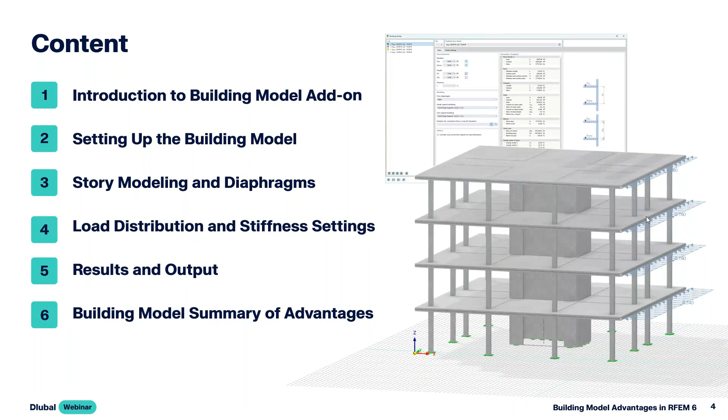So for those of you joining us today that are familiar with our program RFEM 6, we do operate with this add-on concept. So this multi-story structure can certainly be modeled in RFEM 6 alone. However, we do have some advantages of the building model add-on that is available in addition to the base program RFEM. The first is to apply story-based organization. So essentially, we can take this 3D model within this general FEA software of RFEM, and now we can define stories, which again is ideal for multi-level story structures. This allows us to make quick changes to our floors rather than manually having to edit those.

We also can carry out the gravity and lateral analysis together within one file. We don't need two separate programs. We don't need two separate files. So we'll see today how that can be carried out.

We also can simplify the load distribution and apply diaphragm stiffness settings across our floors. So we'll discuss in great detail those two topics today within our example. Now, this is certainly possible within RFEM 6 alone, again, without the building model add-on, but we're having to manually make these modifications directly within the stiffness matrix of our floor, for example. When we do utilize both a semi-rigid and rigid diaphragm, we also have the ability to separate out what we call the 3D wall from the 2D floor calculation. And again, we'll be covering that in our example today.

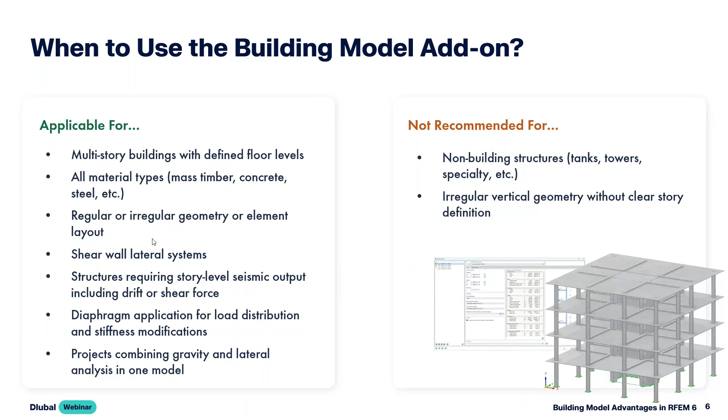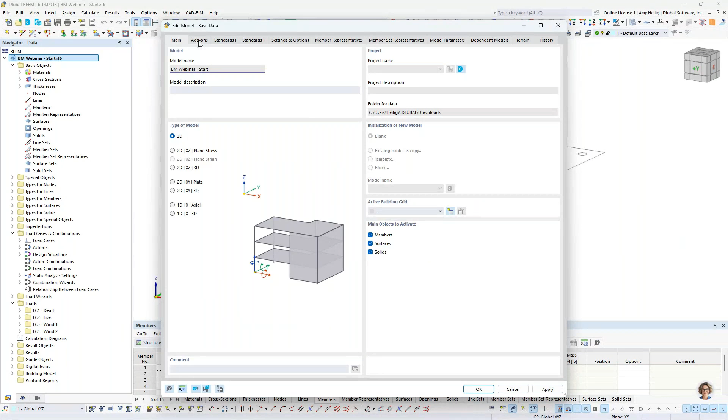Okay, so we will get into our first example today within RFEM 6 directly. So when you do begin a new model here, you are presented with the base data dialog box, and the type of model will be in the 3D environment. The second tab within the base data is all of the available add-ons. So of course, we'll be focusing entirely on the building model add-on, which is activated for today's example.

But as mentioned, it would be quite common to pair this with some of the additional design add-ons, like concrete design, to carry out the reinforced concrete design according to the ACI or the CSA standards. Steel design, timber design for mass timber structures is certainly also possible. We will be generating our load combinations automatically according to the ASCE 7, the 2022 standard, but of course, many other international standards are supported.

So once we have defined this information, we are within the main program RFEM 6. And you'll notice here that I have already imported in a DXF file as a background layer, so this will just assist me with my modeling. If we go to guide objects, and I'll go ahead and collapse this additional folder here, down at the bottom within background layers, this is where I have just imported in a DXF file directly from something like AutoCAD. You can see the elevation was set at 10 feet in height.

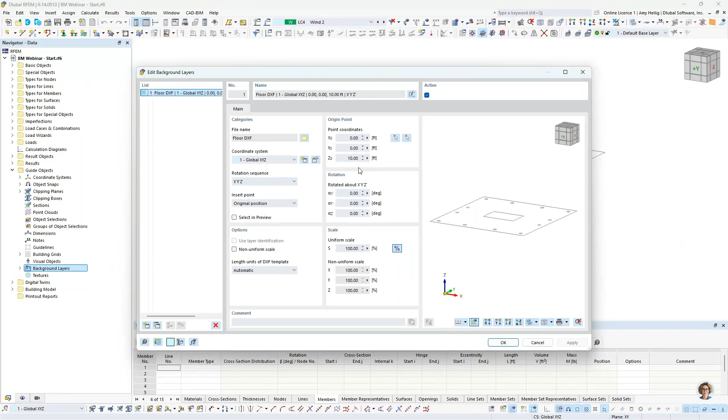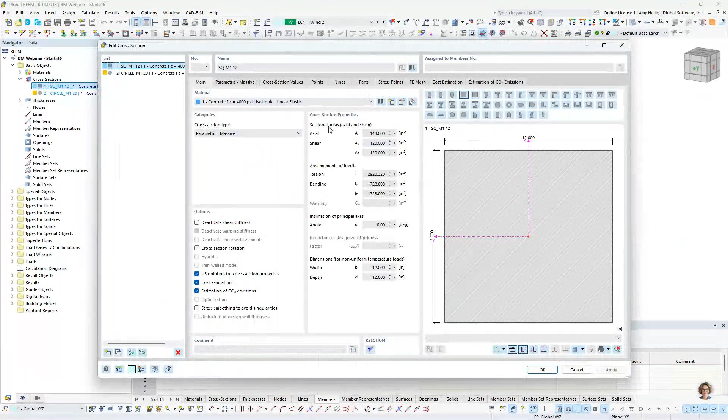I also have defined here some basic objects just to get our model started today. For example, I have defined already from our material library 4,000 PSI concrete - it will be a concrete structure for this example. I also have defined a couple of cross sections. If we look at these existing cross sections, we have a couple of them, just a square cross section, 12 inches by 12 inches that I'll use for my beams, and then a circular cross section, 20-inch diameter, that I will be using for the columns, both with the 4,000 PSI concrete assigned.

I also have a couple thicknesses defined. Thicknesses are assigned directly to 2D surfaces within RFEM. The first thickness is 8 inches - this will be used for our elevated slabs. And then we also have an additional thickness of 12 inches that will be used for the shear walls, again, both assigned with that concrete material.

So we want to begin modeling our structure, but before we do, I'm going to access the building model folder over on the left - this is only available because I've activated this particular add-on. I can right click here to create a new building story. Now, this dialog box we will get into in much more detail a little bit later on, but I want to initially define my first story with a height of 10 feet. And I'm going to create 3 additional stories here, again, all with a varying height of 10 feet. So 4 stories defined - again, we'll get back into this dialog box a little bit later to explain it.

So we see those listed here under the stories. So we're now ready to begin modeling, and I will go into an elevation view here and utilize this background layer. With the building model add-on, we have some additional tool options here that are not available in RFEM 6 directly, and this is just to make our life a little bit easier when we're modeling these elements at every single story for a multi-story structure. We will begin here with defining and drawing our column elements.

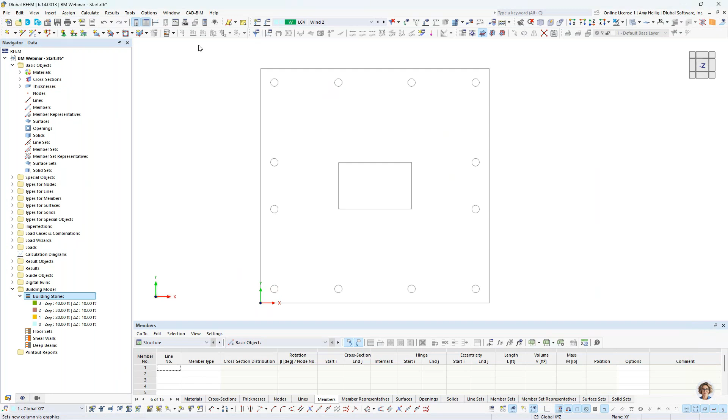So we go ahead and select column from this special toolbar, and the member type is set to beam. So remember, RFEM is a general FEA program.

A beam is really just any standard member, whether a beam or a column, so we'll leave that member type as is. For the cross section of our columns, we'll toggle down to the existing circular cross section already defined. We could additionally add moment releases like hinges at the member ends, but if I don't define anything, everything is considered fully fixed, so we'll leave our elements fully fixed for today.

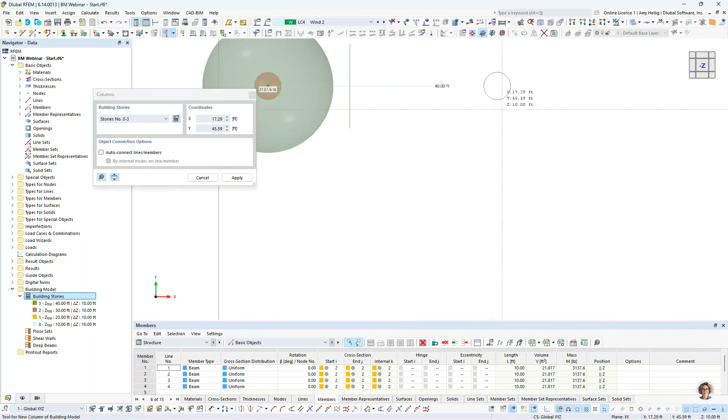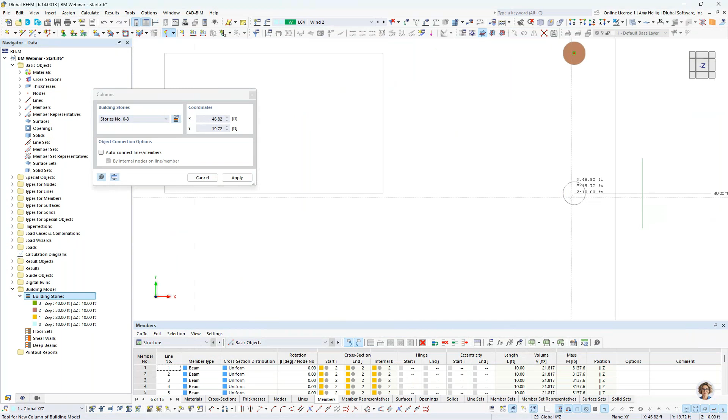There's a special dialog box specific to the building model tools where I can draw this column but apply it to all stories, so all stories are activated here. Zooming into my DXF drawing grid, we can apply these columns with a single click at the center of the background layer. Notice this big ball that adjusts every time I snap to create a new column - that's the center of mass, which detects every new element added and adjusts accordingly.

We'll go ahead and assign the additional columns at the bottom of our page. I can right click to exit out of this tool. If I turn this to an isometric view, you can see these columns were applied to every floor level - so these building model tools can be efficient.

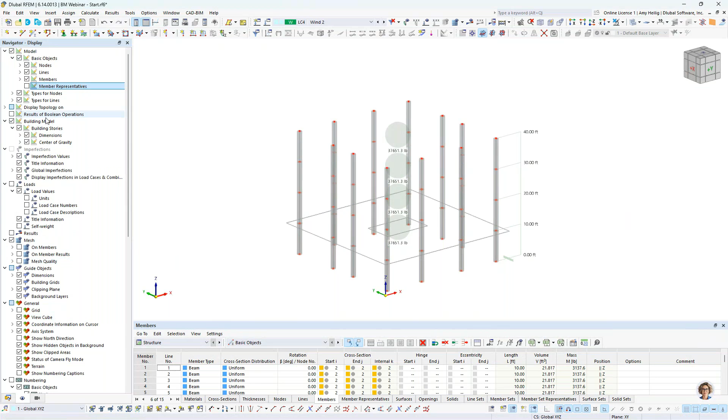I'll go ahead and hide what we call our member representatives graphically. Also, if the center of gravity or center of mass gets in your way graphically, we would just go to the navigator, the second tab, and under the building model, deactivate that. So going back to the plan view, we want to move on to drawing our beam elements.

Utilizing the building model tools, we have the ability to select a new beam. Exact same workflow as we saw for the columns, but this time I want to select my square cross section. I click OK, and then I snap directly to the center point of my column. I right click once to exit, and go ahead and do the same thing here.

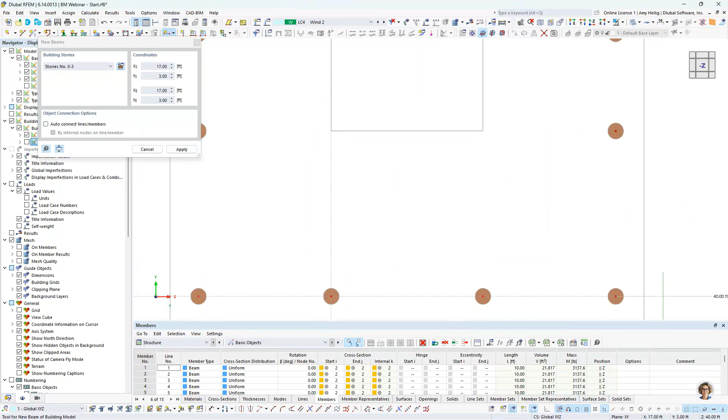I'll be connecting these to what will be our shear walls eventually. These can be thought of as collector beams, for example, transferring lateral loads from the columns to the shear walls. We'll apply these beams at the left-hand side and finally at the right-hand side.

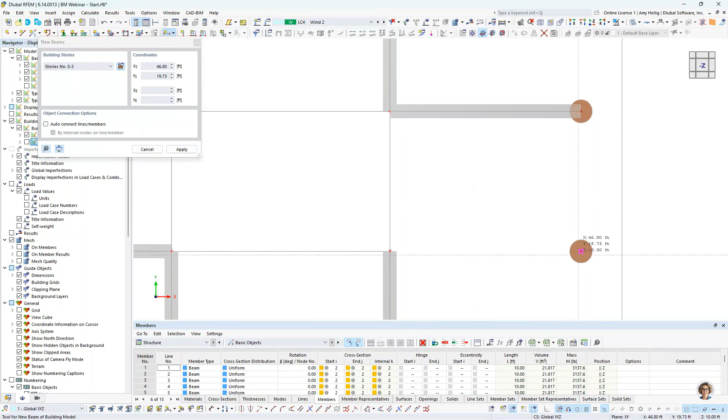Now that the beam elements are defined, those should be applied to every floor. We right click to exit, and we're now ready to draw our elevated slabs.

Within my building model tools, I'm now going to access a new rectangular floor - a two-dimensional surface element. I've already defined the thicknesses within the model, so we'll select our 8-inch thick 4,000 PSI concrete from the dropdown. I click OK, and this only requires 2 clicks from left to right, and now my elevated slab should be applied at every floor.

We likely need some opening passing through the center of each floor through these elevated slabs. Once again, we have a nice feature in the modeling toolbars where I can draw a new rectangular floor opening, but this time I don't want to apply it to my top story, only the first 3 stories. Once selected, I click on 2 points to apply that opening, and toggling to an isometric view, you can see those openings are now applied to stories 1, 2, and 3, but not the top level.

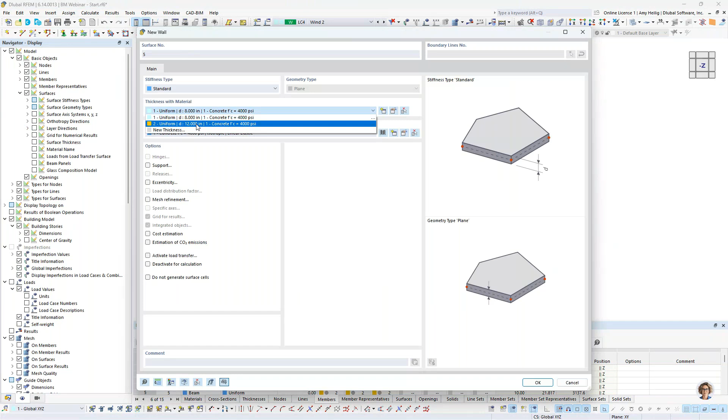The final modeling element we want to apply are our shear walls. We go back into the plan view and select a new element from our modeling toolbar, such as a wall. This time we want to toggle the thickness to 12 inches. I click OK, zoom in, but remember we deselected our top story, so I'll select all stories again to apply these shear walls, then simply snap to my points to draw in these 4 shear walls.

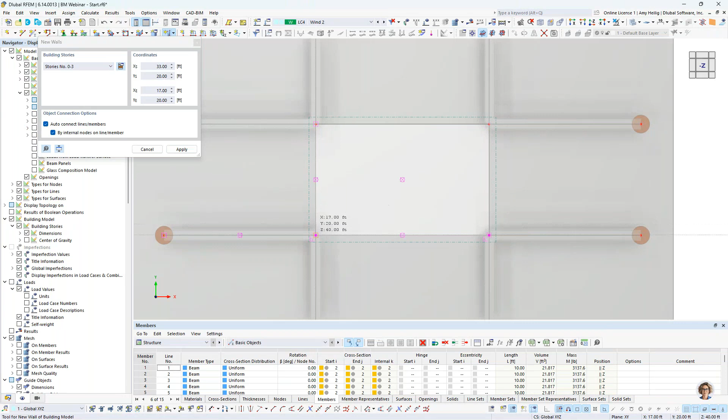I'll go ahead and close the loop here. I can right click to exit twice, and now we have our shear walls modeled. The final modeling step, though, is we probably want to add in openings here to the shear wall, maybe for some elevator, stairs, whatever it may be.

Going back to the plan view, let me turn this into wireframe, and I'll go ahead and select only the front shear walls to create a visibility by the selected objects. You can right click to deactivate the hidden objects. Also this DXF background, if we wanted to turn that off, we could do so within the navigator over on the left.

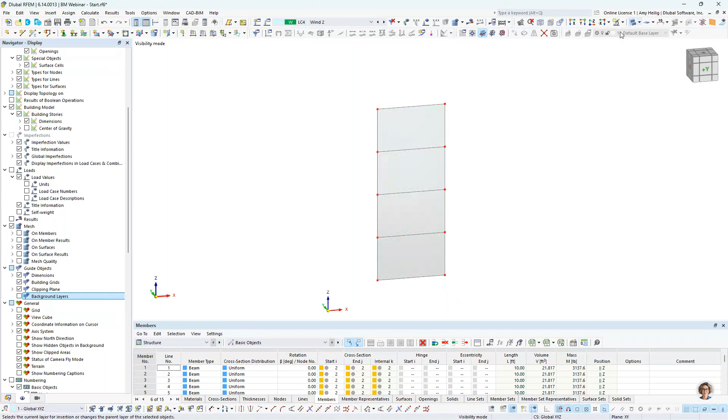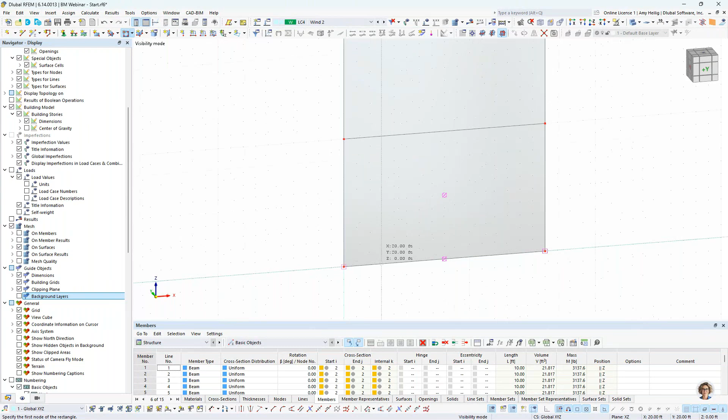Turning this into a rendered view, I do want to activate my drawing grid, so we will snap this drawing grid just to assist us with adding that opening here, and change the orientation. I want to apply a new opening, just the standard opening tool that we find within RFEM 6 directly. So a new rectangular opening, and I'm going to snap here from my point, which is about 3 feet from the edge. My second point will be an additional 3 feet, and we have our opening modeled.

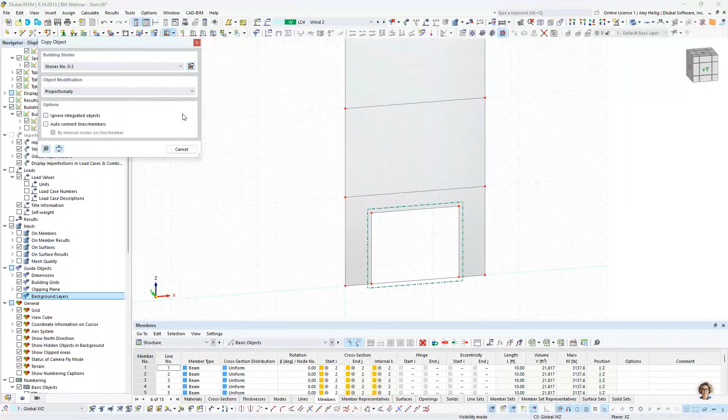A nice feature going quickly back to these modeling tools is this option to copy an object. I certainly could use my Move Copy tool, located here in my toolbar, to copy this opening up. But with the building specific tools, when I choose the option to copy an object, all my stories are selected, and I can click on this opening directly, and you'll notice that it replicates it up to all of my stories.

The quick thing to do here for support reasons is I would like to divide this line where the opening occurs, so I'll use my connect lines and tools just to break apart that line. Canceling out of this visibility mode, we are fully done with the modeling of our structure.

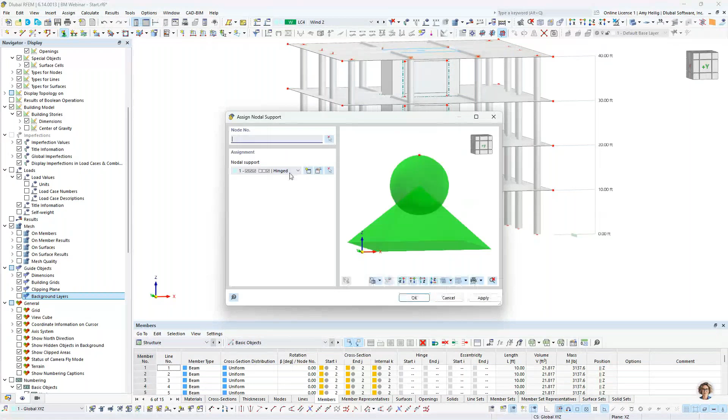What we would like to do now is apply supports at the base. So quickly doing that, we will apply new nodal supports, and we'll use the default option here as hinged supports. I click OK, and then I can graphically highlight over or click on the various columns here. We have one more column in the back, I'll go ahead and apply this to. I can right click to exit that tool.

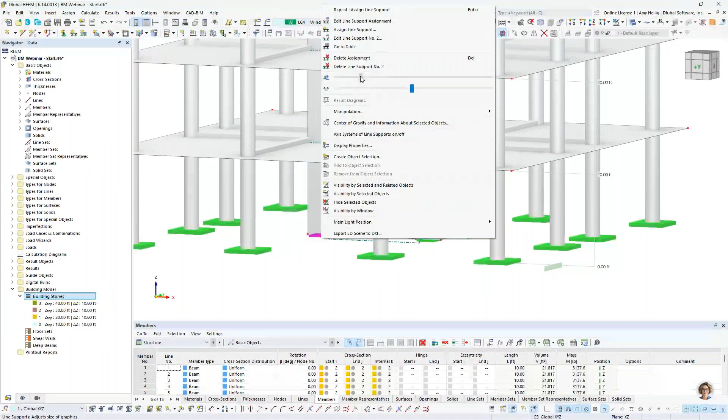Now we also want to apply line supports to the base of our shear walls. In a similar fashion, we will select the new line support option, taking advantage of the default fully rigid support type. We click OK, and then I can graphically select my lines at the base of the shear wall. Visually looking at the support options, I can always right click to decrease the size of these, or maybe increase the number of supports on a line support if I want.

Same concept here for the nodal supports. If I want to decrease the size, we can always use this slider.

Now we would like to move on to some simple loading for today's example. I'm going to go into my load cases and combinations dialog box. Remember, we are generating our load combinations automatically according to the ASCE 7 with this combination wizard turned on. I already created 4 simple load cases for our structure today: a dead load with self-weight activated, a live load, and 2 wind loads. All of these have the action category set according to the ASCE 7, as we need to know how to combine those into the load combinations.

So jumping to the load combinations themselves, we can see all of our factored load combinations generated in orange and all of our unfactored load combinations generated in red.

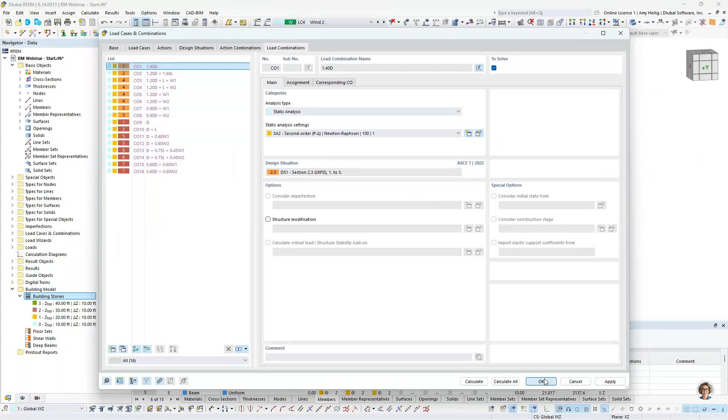Now that those load cases have been defined, we need to actually apply the loads to the structure, so we can jump here to our dead load. Again, for today's example, very simple loading applications: we will just apply a new surface load for our dead load. The load magnitude here is going to be set at negative 0.05 kips per square foot in the global z direction. Then I can graphically select my surfaces to apply this gravity load, using my selection box here to highlight surfaces 1 through 4.

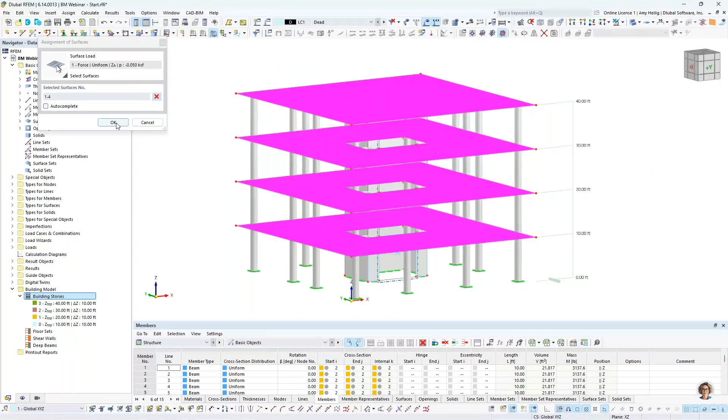If I click apply and next, I remain in this dialog box, and you'll notice in the background these loads are applied to the structures. The openings are also considered at the lower floor levels.

This also allows me to toggle simply to live load. I can modify the load magnitude here, negative 0.075 kips per square foot, and I can directly type in surfaces 1 through 4 on my keyboard, and click OK. Same concept here for live load.

Now for my wind load cases, I did want to make it known that we do have a load wizard, so we could generate these wind loads automatically according to the ASCE7. The structure is perfect for it, it's a rectangular type shape. We can generate load cases 1 and 3 according to the ASCE7, or if we had a rigid diaphragm, load cases 2 and 4 in addition to that. There's also a snow load generator, so I encourage you to check these load generations out utilizing the load wizard.

But for today, again, very simple example, we'll just manually apply these lateral loads. So for our first wind load case, I'm going to apply a new line load. This is not to be confused with what's right next to it, a new member load. A line load would be applied directly to surfaces.

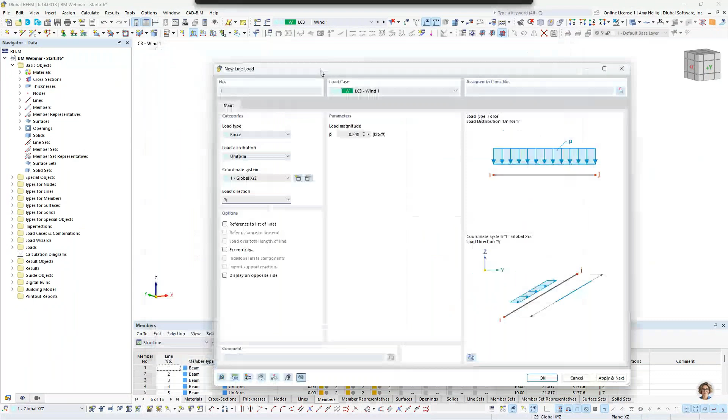So choosing a line load option and modifying the magnitude here of negative 0.2 kip per feet, I am going to apply this in the global Y-axis. We can see our axes here in the background. And then I will graphically select the lines where this lateral load will be applied.

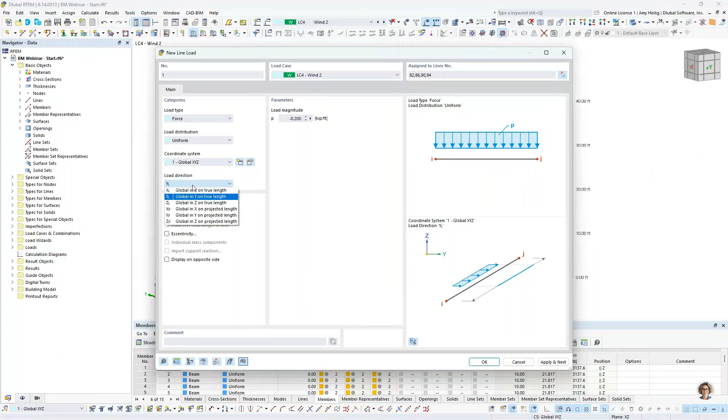Again, clicking apply and next, it is applied in the background here, where I can now toggle to my second wind load case, and simply apply this to our line elements over on the right-hand side by clicking on them. We also want to change the load direction to the global X, and I can click OK. So now we have that additional lateral load for our fourth load case.

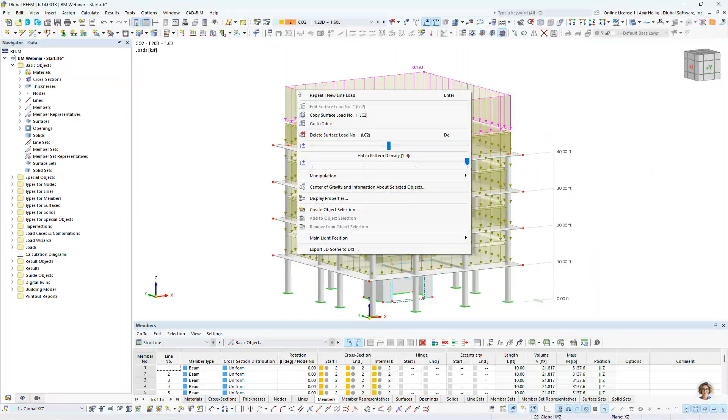If you're interested to see these load combinations applied to the structure together, we can do so by jumping to one of the load combinations. If the display looks a little bit too big, we can always right click and use our slider here too. Taking a look at load combinations that include the lateral load, we can see that displayed on our structure accordingly.

All right, so we want to get back into these building specific features within the building model add-on itself. The next thing that I want to do within the building model folder here is define our shear walls and deep beams. So we will begin first with defining a new shear wall.

Before I do, I will turn this to an elevation view. Maybe just to mention, there are defined visibilities here with the building model add-on. If I quickly wanted to access only a particular story, I can go ahead and turn on those automatically created visibilities. So just keep that in mind that that is available.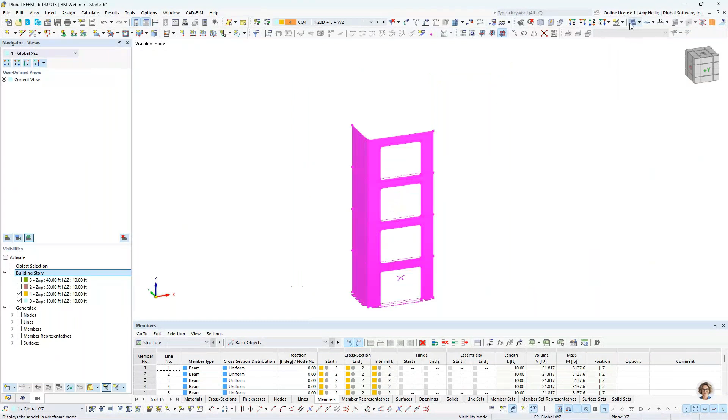But for me, I'm going to go to a plan view here, and we'll go back into a wireframe. I want to select only a couple of shear walls. Now, realistically, we would probably be defining all of our shear walls, but for today's example, let's just focus on these two.

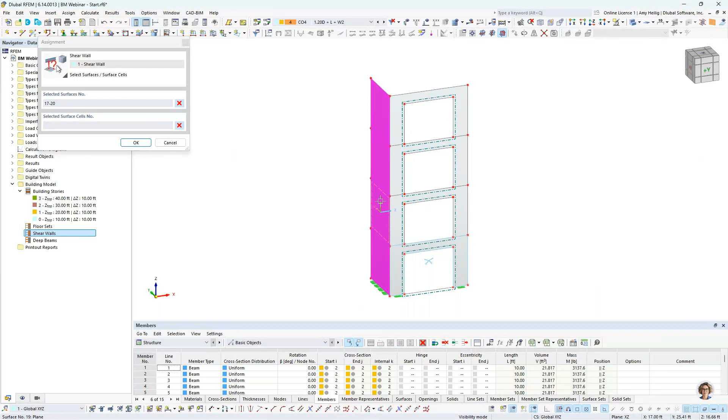So going back to our building model folder, we can right click here to create a new shear wall. The first shear wall will be defined by directly clicking on the surfaces over on the left-hand side. So pretty basic application here, I can directly select the surfaces. You'll notice that the layout is identical at every floor, so we can select them all at once. Now, shear walls do not necessarily have to be in a single plane. They can be L-shaped, U-shaped, box-shaped. Really, anything is possible, but we will just keep this one as a simple application for today.

The other thing I want to mention is pairing this with the concrete design add-on. If that add-on was active, we would have the ability within this dialog box to directly define our reinforcement. But I didn't activate that add-on for today. We have previous webinars combining these two, so refer to those if you're looking for more specific concrete design workflows.

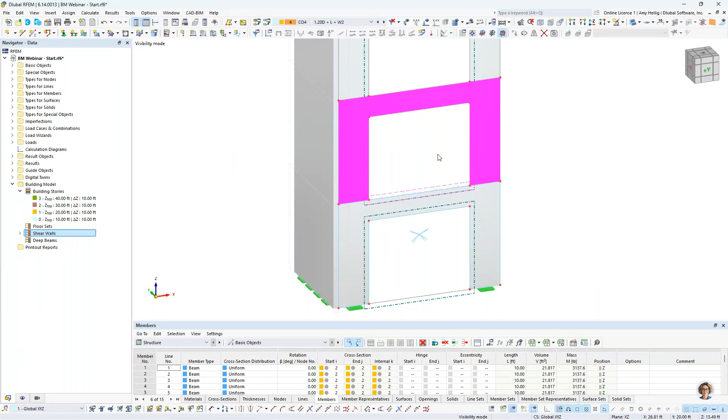Now that first shear wall is complete. The next shear wall poses a bit of a problem because we have this extremely large opening. If I were to define the shear wall by directly clicking on these surfaces, the result output wouldn't be correct, because we're trying to sum up these forces within a very simplified table output, and when we're talking about moments and things like this, it just wouldn't be accurate with such a large opening.

So instead, we can define shear walls with what we call surface cells. That's the visible display here as a surface cell, but this will make more sense in a minute. We need to create the surface cells when we have applied a standard opening to these surfaces, and we have a nice tool in RFEM that will quickly do that for us.

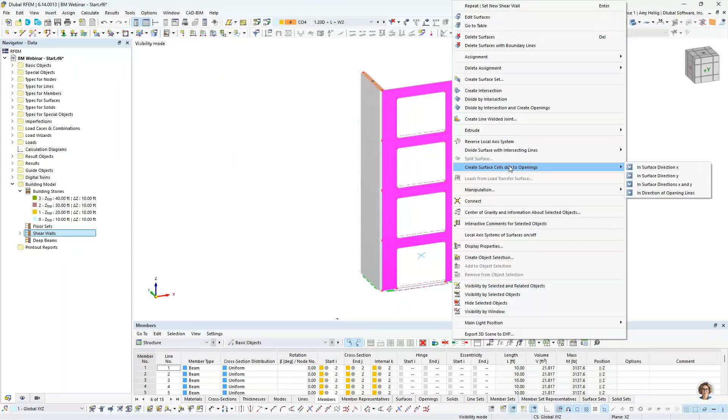I hold down my control key, select all surfaces, and we have the ability to create the surface cells due to openings based on the local y-axis of the surface. When I do that, and turn this into wireframe view, these surface cells are generated at the left of the shear wall, the right of the shear wall, and at the top. You can see those three separate elements here.

So creating yet again a new shear wall, this time I'm going to graphically select the surface cells on the left spanning from top to bottom. I'm going to create another definition here for a third shear wall where we will select these surface cells on the right, and I click OK.

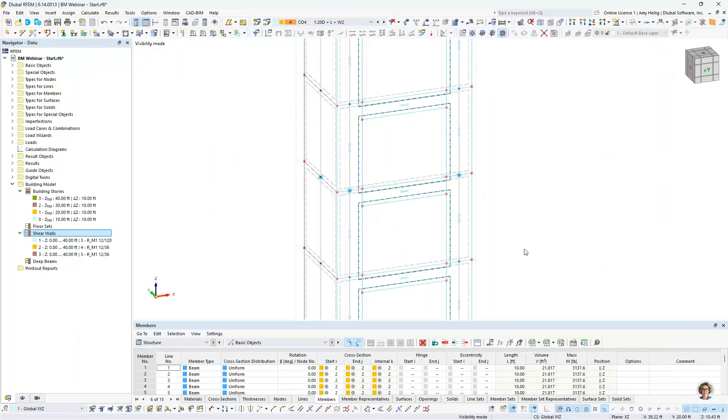So those shear walls are now defined, and I want to move on to defining what we call our deep beams or spandrels. I create a new deep beam definition, and I want to go ahead and select my surface cell that was created here at the top of my opening.

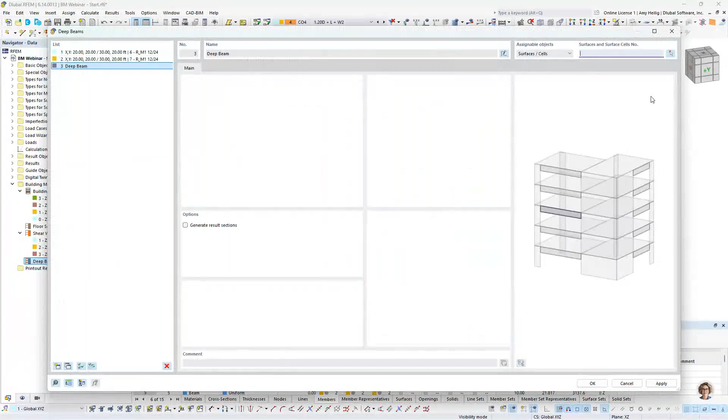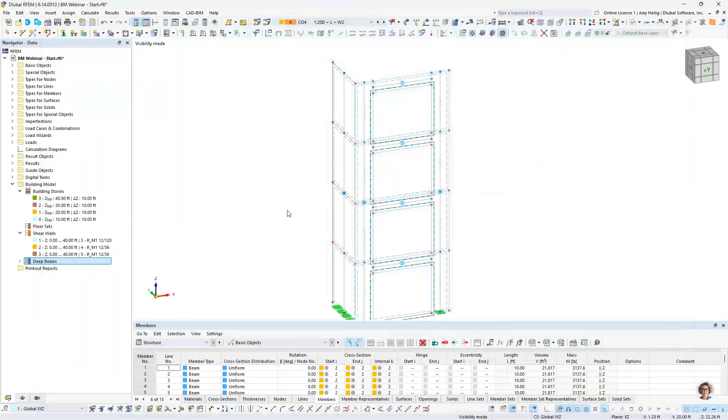I'm going to go ahead and create separate deep beam entries for each one of these surface cells, and we'll do it a third time at the third surface cell here. Finally, we have one more deep beam option up here at the top. Okay, so now all of these deep beams have been defined and we can click OK. Again, if we paired that with the concrete design add-on, we would also see reinforcement options there.

So what is the shear wall and deep beam? What would be the benefit? Well, right now we have these two-dimensional surfaces. But by defining the shear wall on top of that, this overlays what we call a result beam, where result beams integrate or sum up all the stresses and forces from surface number 17 and present it to us in a more one-dimensional format.

So we're going to be able to see the total axial shear forces and bending moments of this wall presented in a much better format than a 2D surface within this general FEA program.

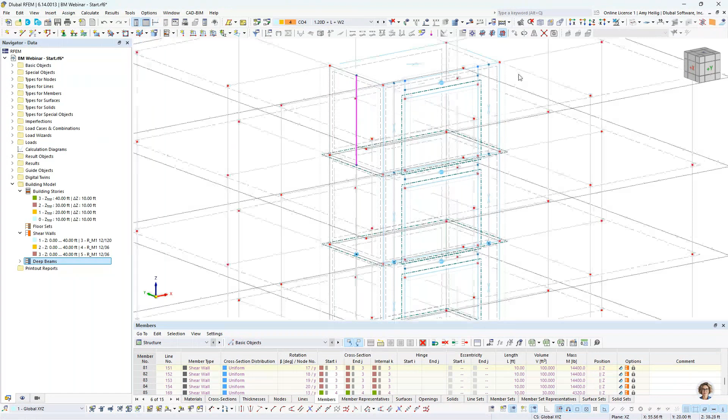So now that the shear walls and deep beams have been modeled and defined, we want to go back to the building stories. I'm going to right click here. If you remember, this was the dialog box that we were initially in to create our four different story definitions. So let's dive a little more into some of these various settings.

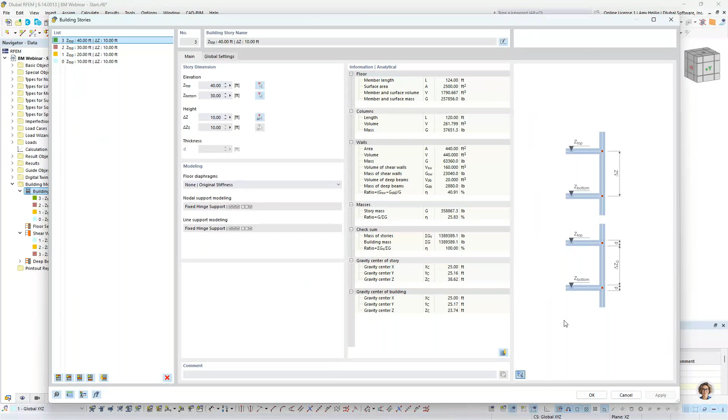You'll notice that I can toggle this view over here on the right-hand side, and as I click on each story, the program shows me a nice view of all the elements tied to that particular story. We also have defined here the height for each one of them as 10 feet.

Now, this is all related to diaphragms. We will get into this in just a minute, but I'm going to take a look at the global settings to explain these options further. The first is, what is the ground level elevation, so that we can begin our first story? This is set as 0 feet by default, but perhaps if you're modeling only upper stories of a structure, you could modify the ground level elevation here.

The story height modification. So there are 4 options here. The default option is no selection, so we just have this dash selected.

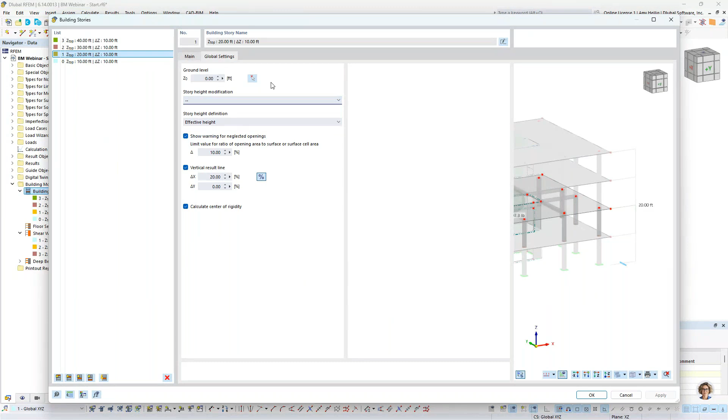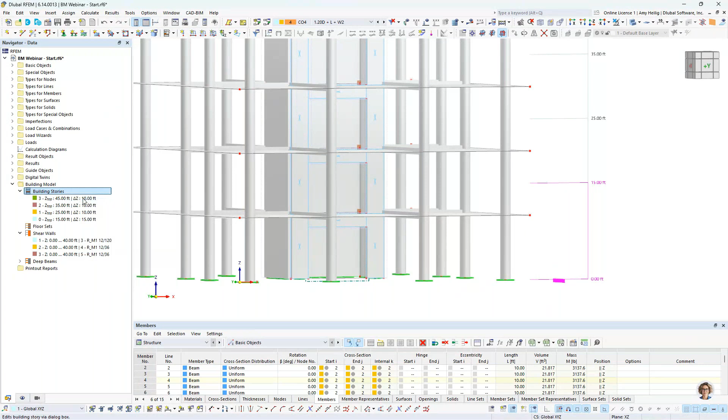What this means is that if I go back to my story definitions and tell the program to modify the first story to 15 feet, and I click OK, nothing is modified within the RFEM model itself. But now we have this story definition that lands right in between my stories, so it's not affecting the RFEM model directly, but rather just the story height definition. So we'll go ahead and change this back to 10 feet.

But the other options include fixed to top, fixed to bottom, or proportionally. These options refer to any intermediate nodes between stories, and for example, today these are the intermediate nodes for our openings on our shear wall.

If I were to select fixed to bottom, for example, and modify that story height to 20 feet, well, fixed to bottom means it will add an additional 10 feet to the top of this shear wall and story itself. Sorry, it's kind of opposite - fixed to top means it will keep these elements the same and add the 10 feet to the bottom of our story. Fixed to the bottom will go ahead and add that additional height to the top of the story, and then proportionally will tell the program to apply 5 feet at the top and 5 feet at the bottom. So let's take a look at what exactly this will do.

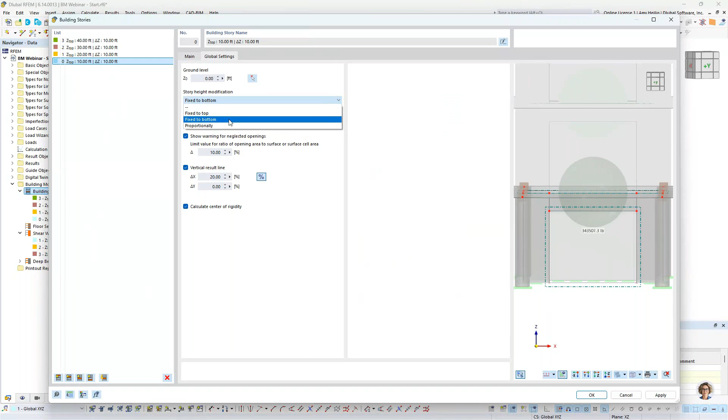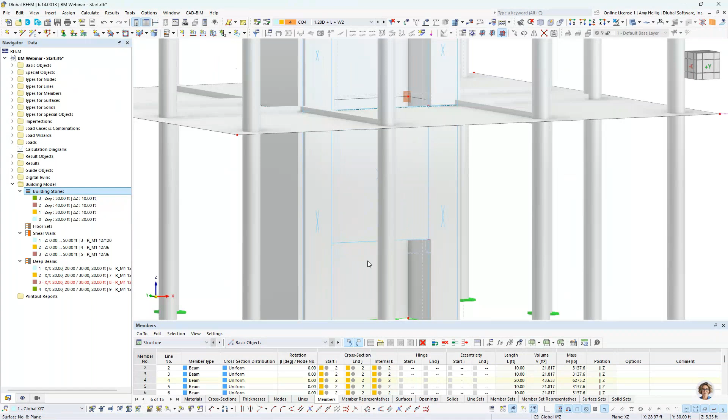So we'll choose the fixed to bottom option. I'm going to edit my first story level height to 20 feet, and we'll click OK and see how this affects our RFEM model. You'll notice that the first story height is modified within the RFEM model itself, not just within the story definitions. And because we have fixed to bottom, it has applied an additional 10 feet above those intermediate nodes. So essentially, that's how those different options will affect our structure.

Now we'll go back to the building stories here. We want to modify this back to 10 feet, and the global story height modification settings we'll just change back to nothing.

The story height definition is initially set to effective height, which measures from the center line of the slab to the line of the upper slab. Alternatively, with clear height, we have the ability to define a slab thickness, and this height will be measured from the base of our structure up to the bottom of the slab element. So if I put in 1 foot here, for example, the height would be from the bottom of the structure to the bottom of the 1 foot thick elevated slab.

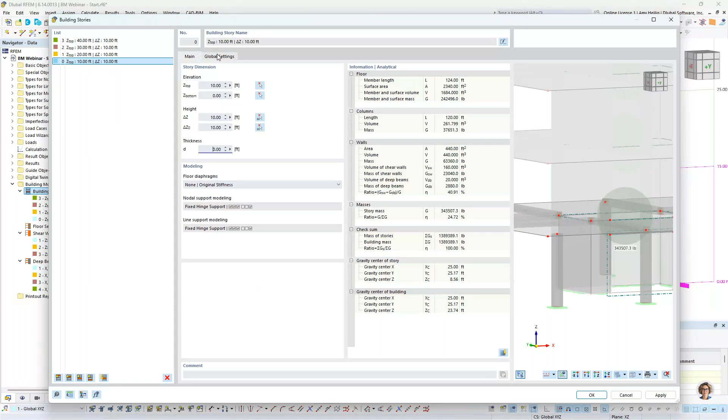Show warning for neglected openings - this is what I was talking about with the shear wall definition. If we have extremely large openings, or any opening larger than 10% by default of the total area of the surface, and we try to define a shear wall like we did previously, the program will give us an error. It will say, wait a minute, you have a pretty large opening, so the output of your shear wall forces may be incorrect. So we want to look at something like surface cells, or maybe model each of these as separate surfaces - that's also a possibility.

The vertical result line - this will make more sense once we actually run the calculation, but this is a vertical section for a result diagram that will be displayed graphically within our results. This relates to where you want to place this vertical result line graphically. Do you want it set as a percentage, which refers to the center of mass in the X and Y directions? Or do you want to toggle this off and simply set this distance in feet from the origin point in the X and Y directions?

The final one is calculate center of rigidity.

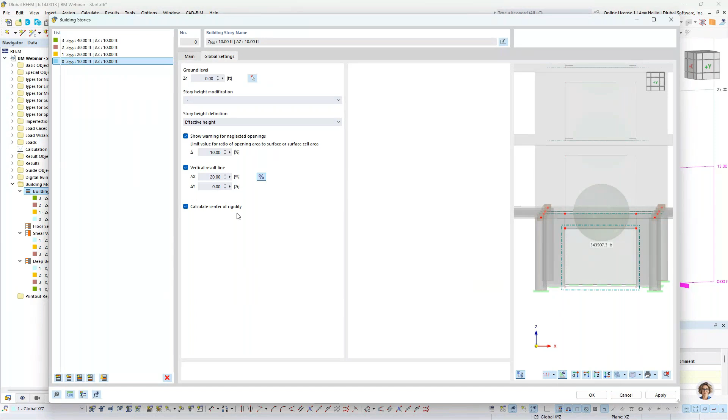So this one's very interesting in the fact that whether you have no diaphragm defined, or any one of the other diaphragms defined—flexible, semi-rigid, rigid—we will always calculate here a center of rigidity when this option is turned on. And we know the center of rigidity is a point at each floor where applying a lateral force causes translational movement only, but no rotation.

We typically determine the center of rigidity with something like a rigid diaphragm only. But in RFEM, it's entirely possible to determine the center of rigidity for all other diaphragm options or no diaphragm at all, because internally we are going to convert our floors with a rigid in-plane stiffness in order to determine that point. Now, this does not affect the analysis—we're not going to apply a rigid diaphragm for a flexible one. It is purely just used to calculate the center of rigidity only. If you want to turn that off, you can go ahead and do so.

All right, so now we're going to get into the diaphragm options. Within our drop-down box here for each floor, we have 4 different options for diaphragms: either none, semi-rigid, rigid, or flexible. So let us go back to the PowerPoint to discuss this topic in more detail.

So we might be wondering, when would we want to model a diaphragm within our RFEM 6 file versus maybe not defining a diaphragm at all? Within this table here, I have listed the 4 diaphragm types: rigid, semi-rigid, flexible, and then no diaphragm at all. Starting first with the rigid diaphragm, this is typically recommended for floors made up of concrete flat plates or slabs.

Perhaps you have some type of composite deck with a thick topping, where ultimately what we want within the diaphragm behavior is rigid in-plane stiffness, where we distribute these forces to lateral walls and frames. But what we don't want is any out-of-plane flexural stiffness of our floor contributing or polluting the lateral stiffness. Now, in a similar manner, we also have our semi-rigid diaphragm.

This might be used for concrete with significant openings, perhaps a deck with a very thin topping. It also can be used for mass timber, but I do want to specify, if you're modeling something like a CLT floor, it should be one continuous surface. If you are modeling with joint behavior—I'm talking about line hinges where we release the moments and account for the slip of the connections—I would not recommend a diaphragm at all. So basically mass timber, CLT, if you're not modeling those joints in detail.

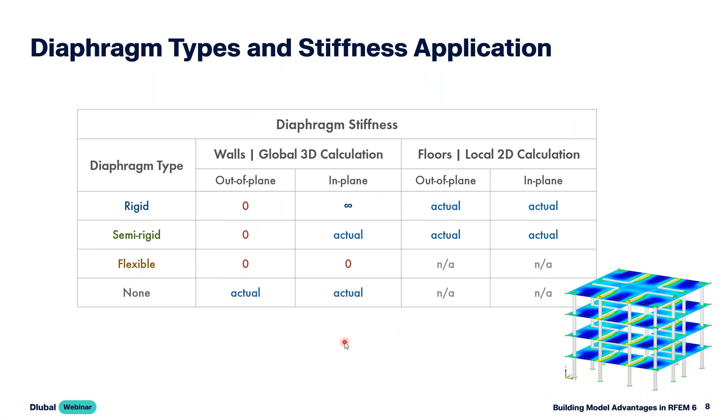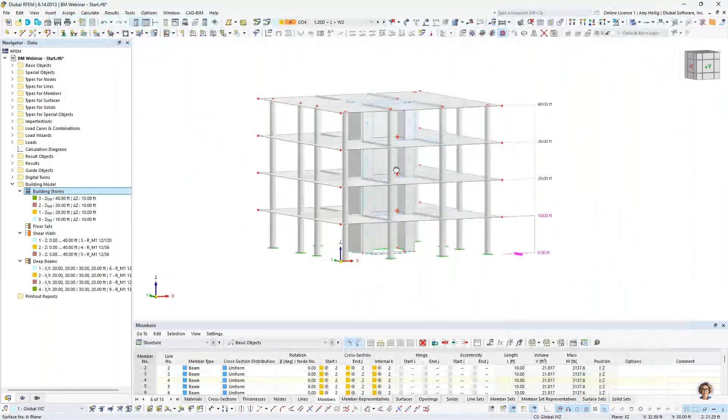So going back into RFEM, let us take a look at applying these different options within the program. You can see by default that the floor diaphragms is set to none within this dropdown, so no diaphragm simplifications will be applied in this initial case. If I jump down to my dead load and display my loads here, what essentially will occur is the load will be applied and distributed to all elements just purely based on FEA. This is true for gravity, for lateral, everything is applied together in these different load combinations. So nothing necessarily so unique here.

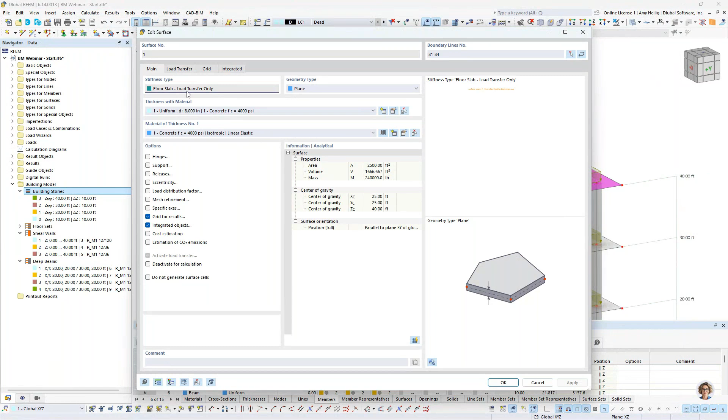But going back to the building stories, if we highlight all 4 stories and change this to a flexible diaphragm only, when we click OK and go back into the RFEM model, you can see this created floor sets. I'm going to turn that off graphically. We're still looking at this dead load case. What you'll see now when I double click on my floor is that the stiffness type went from standard to what we call load transfer only, or flexible diaphragm. I can't change this, it's grayed out because it was set directly within the building model add-on. So within the calculation, no in plane or out of plane stiffness will be used within the stiffness matrix of this particular element. Rather, it is used for load distribution only.

So under the second tab, we can see the different options for these load distributions. The default here is going to be FEA. The other 3 options are just simple tributary areas only, so we either have one-way area load distribution or two-way area load distribution. Circling back to the FEA option, which again is set by default, what this does is that internally, this surface will be considered, will be converted to a rigid element. And everywhere where we have a beam, a column, a shear wall framing in underneath it, we replace it with a rigid support, whether that's a rigid nodal support or a rigid line support.

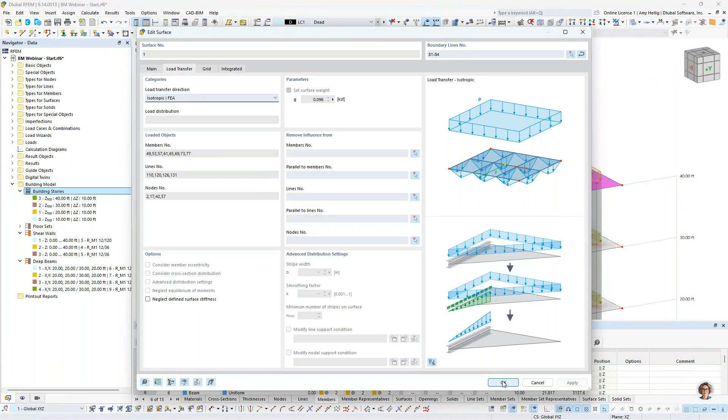We determine the reactions from this submodel, and those reactions are essentially what we use to distribute the loads to the structure. So if we leave this at the FEA option and click OK, looking at a dead load only, I'll run a quick calculation. If I tried to run a load case with a lateral load too, I would get an instability because I don't have any lateral stiffness to my structure. Otherwise, if this was a flexible diaphragm, but for this gravity load only, we should be able to see what this load distribution and results look like. So we'll cycle through a couple of calculations: first to determine the load distribution, then to actually run the analysis within RFEM.

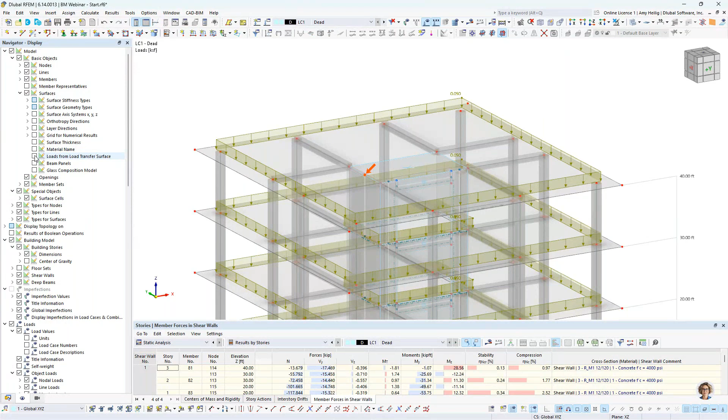So what we'll see here is our results. I'm going to turn off the display of my FE mesh, and under my viewing options at the project navigator, if I expand all the way at the top under my surfaces, I have the ability to convert these loads to a load transfer surface to see exactly how they're going to be distributed. This is what the program is doing internally, and I'll create a user-defined visibility for only these elements with the FEA option, showing in detail how these loads are going to be distributed to the objects.

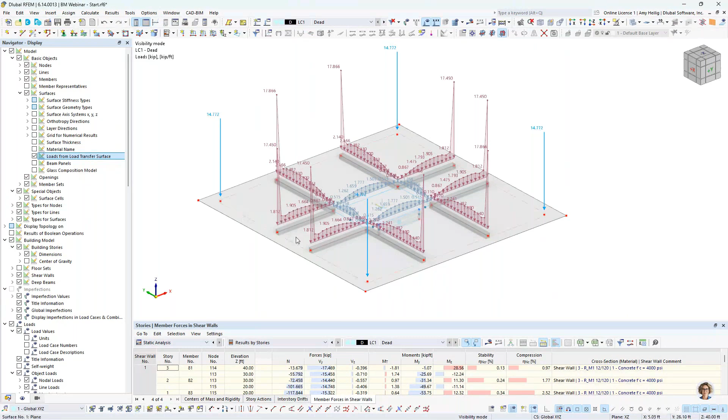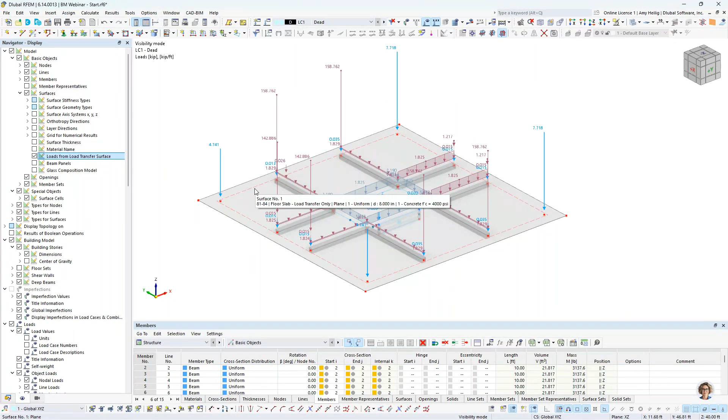If I double click on this floor and modify this load transfer option to, let's say, X and Y stripes, and click OK, it's telling me I need to clear my results. We don't need to run the calculation because it's all just based on analytical tributary area, but you can see how much more simplified this looks compared to the FEA option. So turning this back to the FEA option by default, we can cancel out of this visibility.

I do think it's important to explain how these loads are applied when we modify the diaphragm type to something like a rigid diaphragm. So let's go back to the building model add-on, and I'm going to change all of the diaphragms now to the type rigid. Semi-rigid and rigid are very similar, so we'll just continue on with a rigid diaphragm for today. You'll notice that these options listed below are now going to be applicable for the semi-rigid and rigid diaphragm.

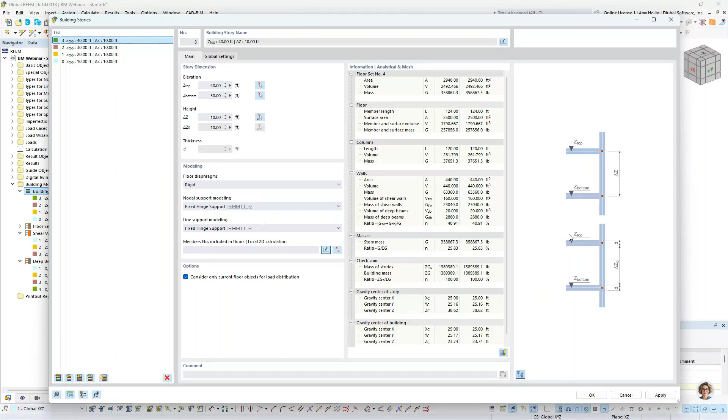These are specific to that local 2D floor calculation I was talking about in the PowerPoint. Remember how I mentioned we extract each floor out of the model for this 2D calculation, and we use the true in-plane stiffness and out-of-plane stiffness for the floor analysis and design.

I also mentioned that everywhere we have a column framing in or a shear wall framing in, we need to support that within that local 2D model that's going on underneath the hood. So these are the two support options available. The default is just a simple hinge support for both the nodal and line supports, but within this drop-down box, you can get pretty detailed in terms of how that 2D floor element is supported.

For example, we have elastic columns where you can define whether this column is hinged or rigid at the base, and hinged or rigid as it frames into the surface. The program knows the material, the height, and the dimensions, so it can calculate the true stiffness of this column framing into the slab and apply what we call a spring constant for our nodal support. The exact same concept applies for line supports for walls — we can get a little more detailed rather than using a general hinge support.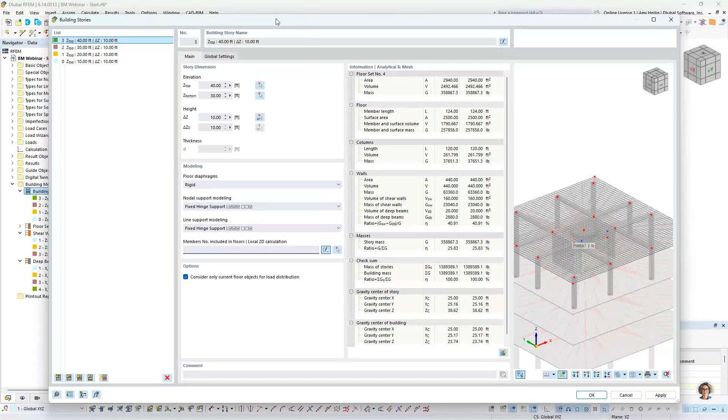Now, the members included within this local 2D calculation — if I had elements that were members, beams that were gravity only, for example beams spanning between the columns to shear walls — if I wanted to consider them for gravity loads only and not for any lateral loads, I would input them into this option by graphically selecting them or typing in the numbers. When I leave this empty, it means these beams will see both gravity and lateral loads within that global 3D model.

Okay, so once we click OK, because we have gone through all of those details, what you will notice is that the program places these rigid links to represent the diaphragm graphically. We can go ahead and turn off the rigid links graphically within our navigator if that gets in your way.

Double clicking on my floor surface here, you'll notice the stiffness type was automatically updated to a rigid diaphragm, again set directly within the building model add-on.

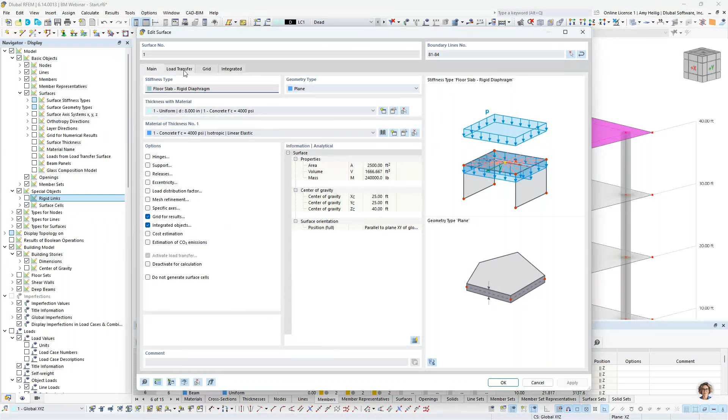Looking at the load transfer, we have the same options here that we previously covered. So we can go ahead and drop down to one of our load combinations that has both gravity and lateral loads to run a quick calculation.

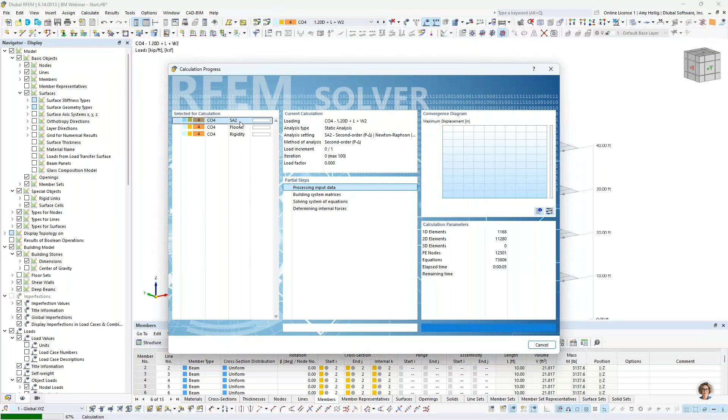Now, for this calculation, it will go ahead first. The first calculation you're seeing is to go through the load distributions for the dead load, the live load, and the wind load, because we have that set to the FEA approach. Then it's going to run through three additional analyses for this load combination. The first is that global 3D model where we make those diaphragm assumptions. We're also running a second calculation where we extract out this floor to use the true stiffness properties. And the third calculation is for the center of rigidity. So that's why you see three separate calculations going on here for this load combination.

So now that our results are complete, let's take a look. I want to start off with the table results. I'll go ahead and turn off the display of the results graphically, and we jump directly to the table. Within the static analysis, we have the results by stories available to us. This would not be available otherwise if I did not activate the building model add-on. So regardless of diaphragms and anything of the sort, it's a really nice output for each story of our analysis data that otherwise we wouldn't get within RFEM 6 alone.

So we can view here the center of mass shown graphically as well as the coordinate points, but we're also getting the center of rigidity. You can see that's slightly offset due to that large opening, and that is given at each of the four stories. We also are given what we call the story actions, which is the story shear force.

So we can see the shear forces in the X and Y directions for each story. This would be important for something like seismic analysis. Same thing with drifts. We give you each drift here in the X and Y directions as well as rotation at each story.

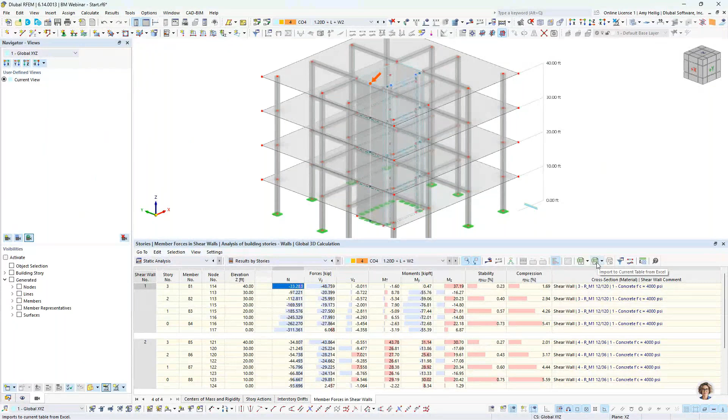And finally, we have those shear walls. Remember, we defined our shear wall, one continuous shear wall passing up over on the left. Each surface is now presented to us in table format. So we've summed up the internal forces of this 2D surface, and we give you a nice table presentation of the total axial force, the total shear force, bending moment. You can export this to Microsoft Excel at the click of a button. Of course, we could take this information further into our design add-ons as well. So a nice output there for the shear walls as well.

The results that we want to jump to now is the graphical display. So when I turn this on, remember for a semi-rigid and rigid diaphragm, you will have this new option within our results navigator where we can view the results of the global 3D calculation versus the local 2D calculation for those individual floor elements. The third option here is to combine both of them graphically, but two calculations were carried out.

So initially you'll notice the global deformation. I currently have this set to the global 3D model, but I think what's going to be most telling in this situation is that we have a rigid diaphragm. This is where we've set the in-plane stiffness to something infinitely high. The out-of-plane stiffness is set to 0 at our floor, but all other elements are active for the applied gravity and lateral loads.

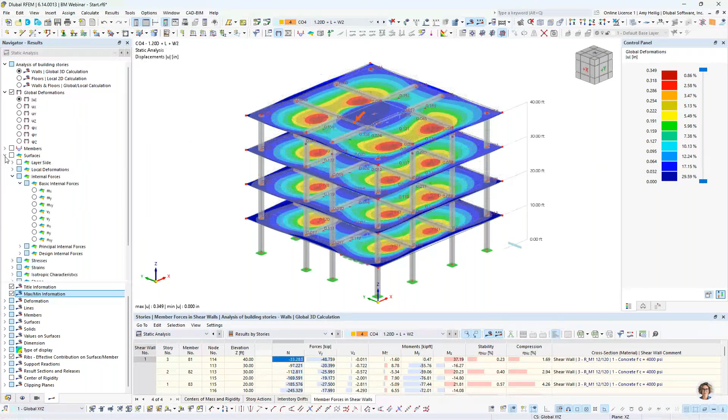Well, looking at the surface results themselves, I'm going to go ahead and just activate here my top floor only. And I'll go ahead and display the hidden objects so we know exactly where we're at.

You'll actually see within the surface results and the internal forces, MX is equal to 0, MY is also equal to 0. That's because we do not have any bending stiffness in the out-of-plane direction. VX and VY are also 0.

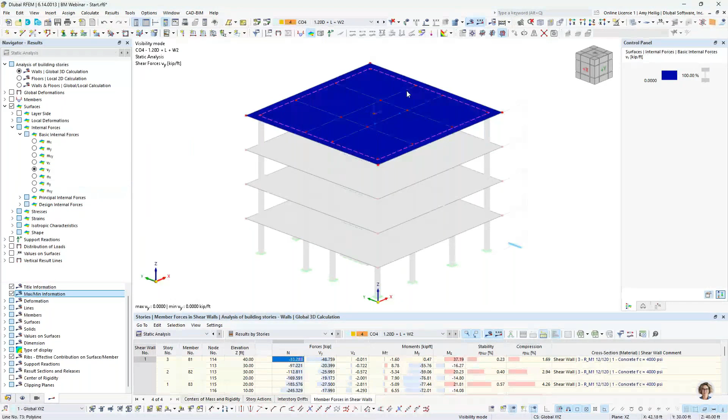But when I toggle this to that 2D floor calculation instead, remember we're now extracting out this floor so that it's a single element, supporting it at the column and wall locations. I actually do see internal forces for MX and MY, those bending internal forces. That's because we're using the true stiffness properties from this 8-inch thick concrete elevated slab. And we're going to apply these loads to it again.

Lateral doesn't really matter here because we've now supported it in this submodel at each of these locations. So we can take lateral out of the equation, and we're now applying only those gravity loads to design our floor directly.

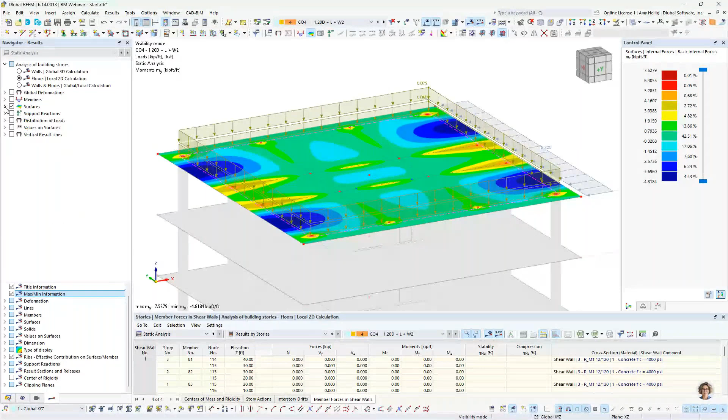What else we can take a look at is our member results. We'll go ahead and turn off the surfaces and cancel out of this visibility mode. And if we look at the global 3D calculation, we can activate the member forces.

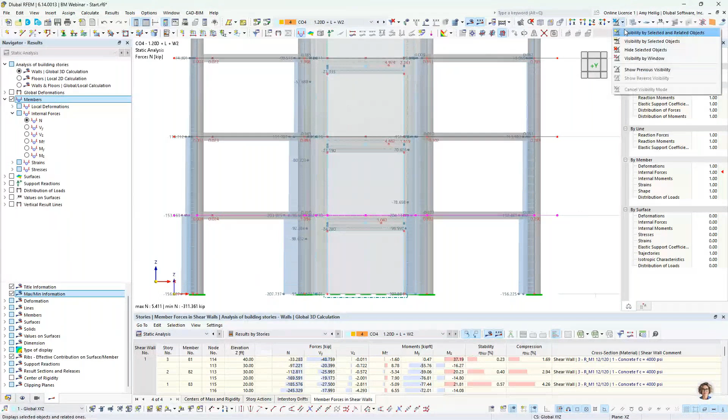For example, the axial forces - I think this is a topic worth mentioning here. I'm going to try and create a visibility only based on my first floor. So looking at my first floor only... nope, I didn't capture my members. Give me 1 second. I want to capture both the floor as well as the members, but I'm trying to also not capture the deep beam.

Okay, so looking at the visibility by the selected objects, you do have axial forces within these collector elements. I know this is a topic discussed in other software - when we have something like a rigid diaphragm, we actually end up bypassing the collector beams because these lateral forces go straight from the columns into the shear walls, because every node is essentially connected to that rigid diaphragm.

But RFEM is still applying FEA principles for all of these calculations, meaning we still use the stiffness matrix for this floor element, but we go directly into the stiffness matrix and we modify the in-plane stiffness and the out-of-plane stiffness, yet we're still using the FEA approaches here. Therefore, these forces are collected in the slab element and they are transferred to these collector beams.

Now, we also can view bending moments because this isn't just lateral loads being applied to the members in the 3D model - we're also applying those gravity loads that we talked about too. We can see them applied here within the model. So we will have these beams designed for the gravity loads as well as the lateral loads.

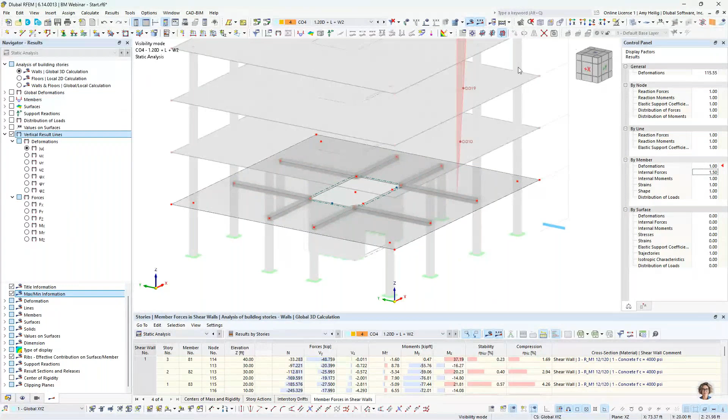The final thing to mention graphically is to go ahead and display, if you remember, the vertical result line. I'll just leave everything hidden for now so you can see this. This is what we set the location to in the building stories dialog box. So this is just a nice format here showing you an elevation view of the results of our entire structure.

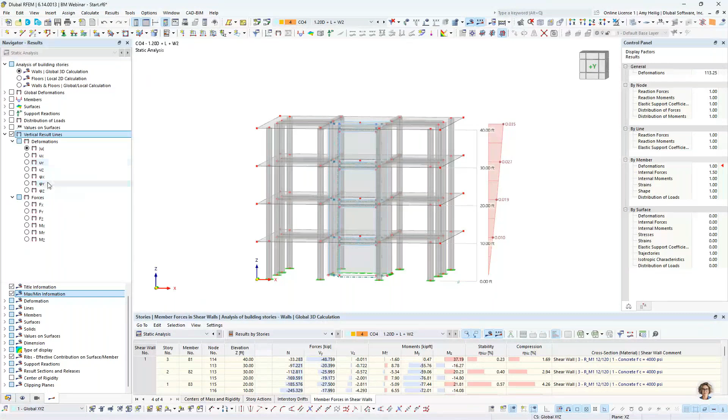So within the entire structure, we can go ahead and activate here - what is the shear force of this building? We can see that the shear forces increase, of course, as we get to the base of the structure, but graphically shown here how those vary at each story level.

We can also view the deformation in the X direction. And as we would expect, we have higher deformations at the top here, again, due to those lateral loads. So this is just a nice output as well, kind of summing up all the internal forces of our structure and presenting it by each story.

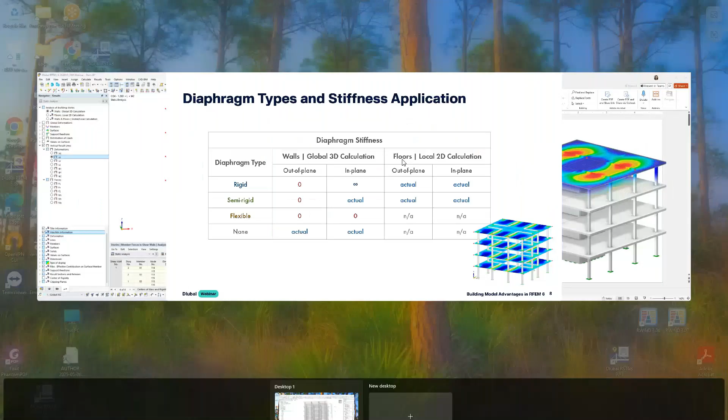All right, so that will conclude our example today. I do want to go back to the PowerPoint here to kind of sum up the building model advantages that we saw today, but also mention a few more.

So to begin, you can see how both the gravity and lateral analysis can be carried out within one file, one model. And we have the ability to automate this diaphragm behavior for both the in-plane and out-of-plane stiffnesses. And in the case of the semi-rigid or rigid diaphragms, we will go ahead and separate out the analyses into that 3D and 2D for our floor design versus all of the other elements taking those additional lateral loads.

Now, as I mentioned, RFEM is still an FEA-based solution, right? Ultimately, this is a very powerful program applying FEA principles.

When we talk about diaphragm irregularities, large openings, this is entirely possible within the program and the building model add-on. This is not affected like what we would see in other software because FEA is used underneath the hood. And with that, we have full control over the diaphragm meshing. We can automatically set a larger mesh, as we see over here on the right-hand side, or a smaller mesh. We can add FE mesh refinements at locations where we know we have higher stress points and want to refine that. This is all possible.

We talked a little bit about those beam collector forces being captured. We are directly modifying the stiffness matrix of the floor element, but still applying FEA. Therefore, the force flows through the slab mesh and those collectors do pick up those axial forces, whereas in other software we may see them bypassed.